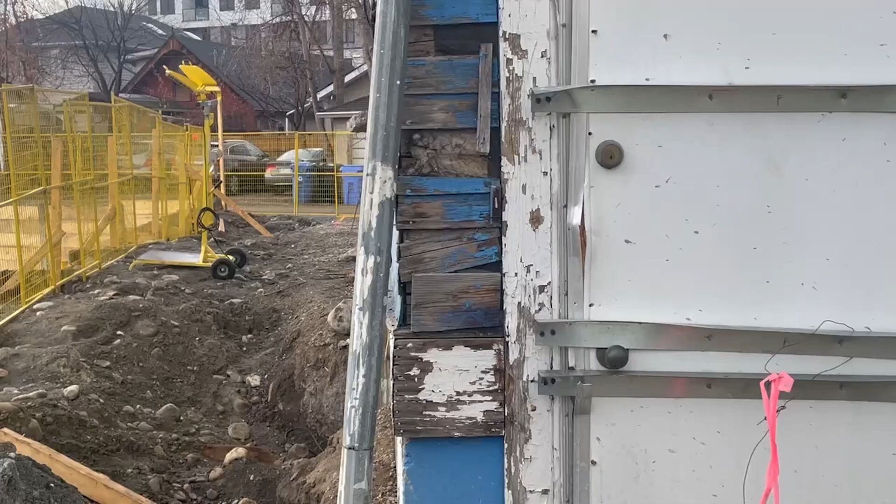Architecture, like music, is an immersive experience. It surrounds you, taking the form of an adaptive reuse project that aims to transform an existing church into an auditorium and performing arts center.

My focus has been on enhancing the experiential dimensions of architecture, engaging with changes in light, time, and materiality. This impulse emerged from my early explorations into the material properties of wood. As a natural material, wood has the potential to enrich sensory experience. By integrating the unique visual, tactile, and auditory qualities of wood into my design, I aim to recall the collective memory and experience of the site.

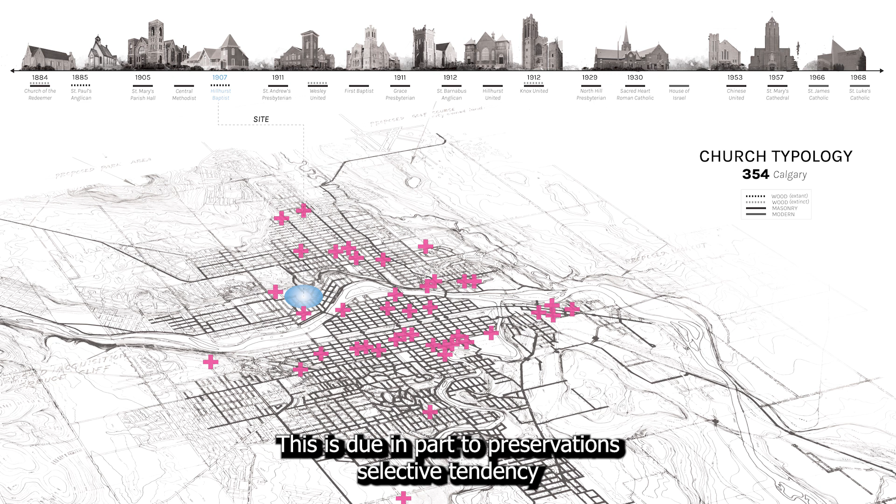My site is the Hillhurst Baptist Church, located in the neighborhood of Hillhurst and Sunnyside. It was built in 1907, a modest Carpenter Gothic structure, and one of the last remaining wood-frame churches in Calgary. This is due, in part, to preservation's selective tendency that places emphasis on the exceptional, which can be observed across Calgary, with the preservation of grand sandstone churches a common occurrence.

Historically, Hillhurst, like many other neighborhoods, was built around the church, which served the spiritual, cultural, and social needs of the community. However, having lost its primary use after the congregation disbanded in the early 70s, it's fallen into disrepair. By transforming the church into an auditorium, the social value of the building is restored.

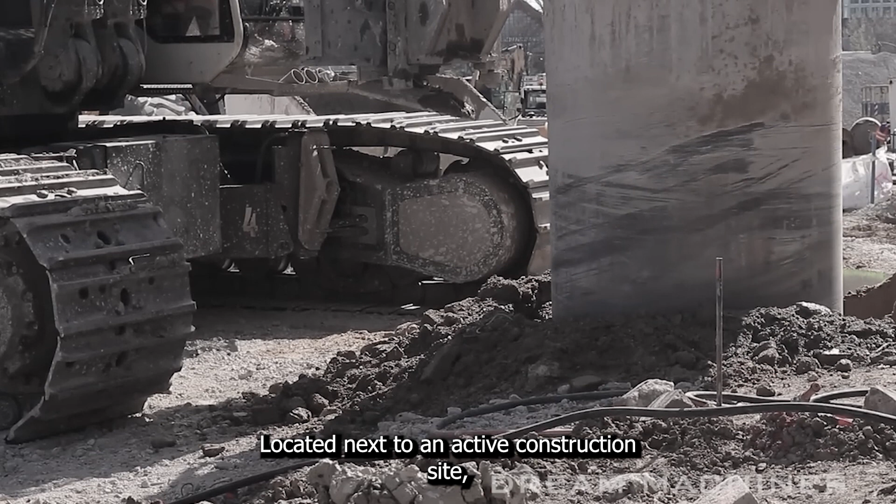Music and dance, like the church, are intricately connected to spirituality. This new musical program respects the historic use of the building while allowing it to once again live and serve an entire community. Located next to an active construction site, the church reveals the rising tension between preservation and development in the area.

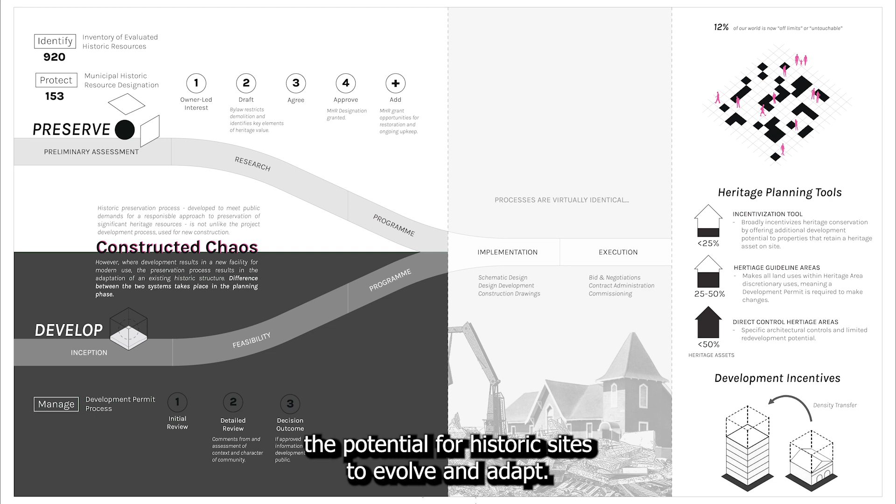The city's regime of preservation severely limits the potential for historic sites to evolve and adapt. Once designated, this building cannot be demolished, but is also subject to strict architectural controls.

The church also serves as a reminder of a forgotten material history in the area, which saw many structures built out of wood, often by local community members. With this in mind, I began to shift my focus to materiality.

Assessing the physical damage of the church, a predictable pattern of decay emerges. Paint peels and chips as the wood shingles begin to curl, split, and crack. The neglect of the structure prompted me to ask, why don't we preserve or restore wood structures?

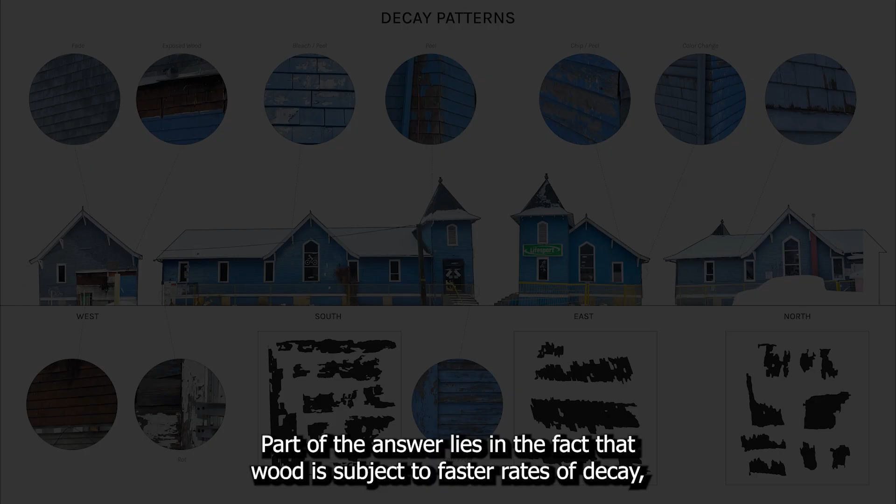Part of the answer lies in the fact that wood is subject to faster rates of decay and thus requires constant maintenance and repair. In response, I designed a repair process that would anticipate and embrace decay, specifically the weathering of cedar shingles. Rooted in the desire to allow the preserve to evolve, this repair strategy makes visible the passage of time. With a less labor-intensive process, the repair also enables continuous community participation in the upkeep of the structure.

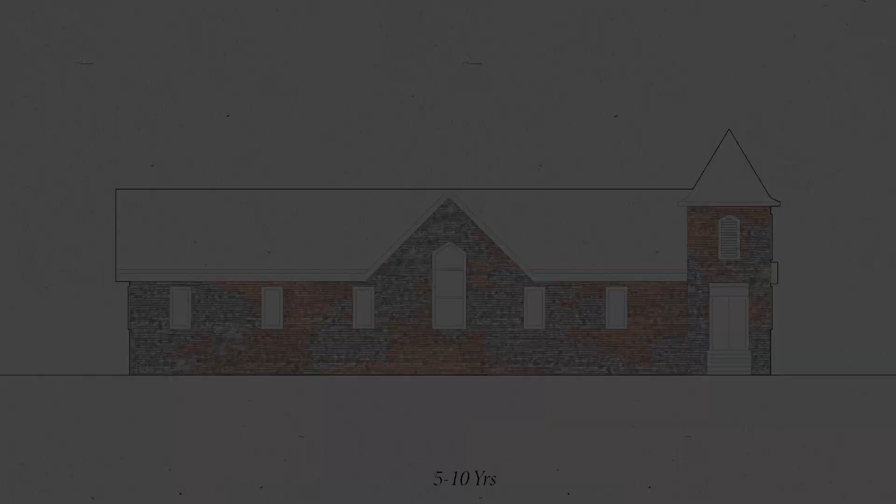Phased over several years, damaged shingles are first identified and then replaced. Over time, a mosaic of patinas appears, revealing rather than erasing past damages to the facade. The striking red color of the existing church becomes visible again only once the aging shingles begin to curl.

This process was inspired by the repair of my broken chair in Phase 1. Taking the form of a 19th century ladderback chair, once durable and well crafted, my chair was found in a state of disrepair. The project required the replacement of the missing seat and the repair of the loose broken joints which made the chair unstable.

The concept of repair asks us to reconsider the value of broken objects as providing an opening for engaging with, tending to, and caring for the things and people around us. My approach considered the concept of repair as care, where an object is approached with the same amount of consideration as would be given to the wrapping of a broken arm or the repair of the human body.

The action of continuously wrapping the broken joints reveals the passage of time and emphasizes the damage. Embracing the practice of visible repair, the cast or tensor bandage becomes a central feature of the chair, to the point that we cannot think and separate the injury from the repair. Through the repeated action of wrapping, knotting, and tying, we are able to track and trace the evolution of the chair through time, as it takes on a new and ever-changing form.

This allows for the preserved to stay alive and yet evolve. An important takeaway from the project was the recognition that an object repaired today will inevitably need to be repaired again in the future. Repair may be a slow process, one that happens repeatedly over many years, but it also provides us with an invaluable method that resists obsolescence and ensures longevity.

Complementary to the repair of the existing church, I designed a new extension that would hold the future auditorium. Taking its cue from visible traces left by the now demolished 1958 Christian Education Building, the church is extended into the neighboring lot. Next, the scale is increased at one end, allowing the form to project sound outwards to the community, similar to the functioning of a megaphone.

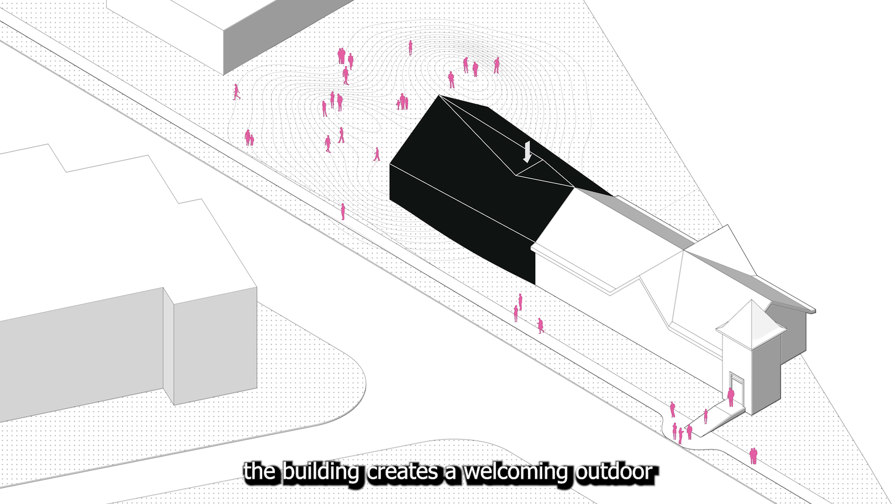Integrated with the landscape, the building creates a welcoming outdoor space for the community in an area of high urban densification, which has led to less public space overall.

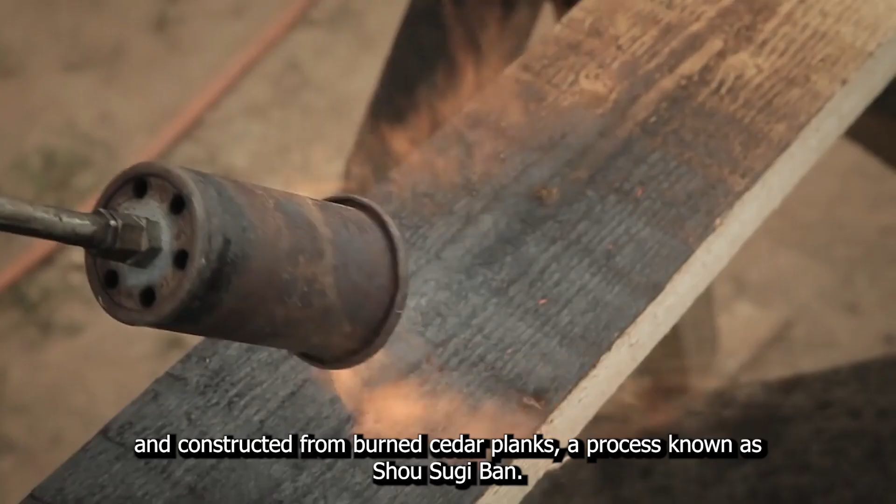In order for the new extension to retreat behind the listed setting of the church, it's conceived as a shadow of the previously existing structure and constructed from burned cedar planks, a process known as Shou Sugi Ban. The modern appearance of the burned wood is mediated by the image of a pitched roof and timber boards that reference the vernacular architecture of the area.

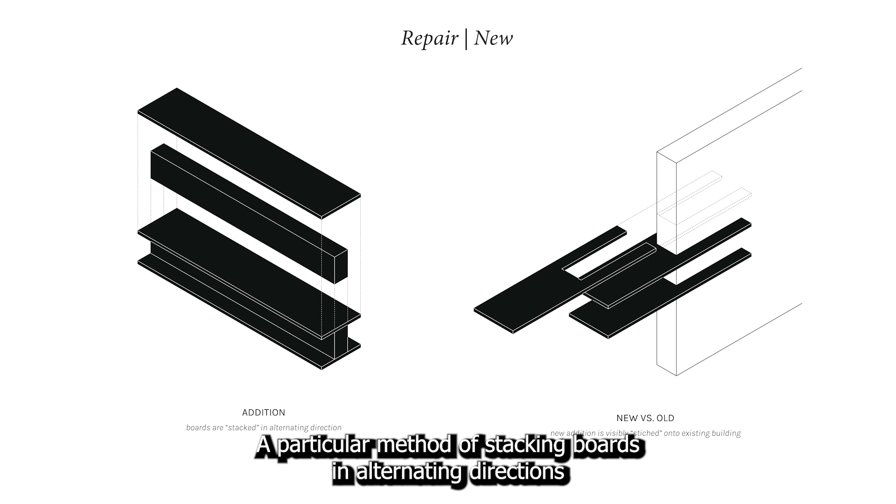A particular method of stacking boards in alternating directions allows the new addition to visibly stitch itself onto the existing church. This implies a certain level of impermanence that allows for the new addition to be removed if ever there was a return to the church.

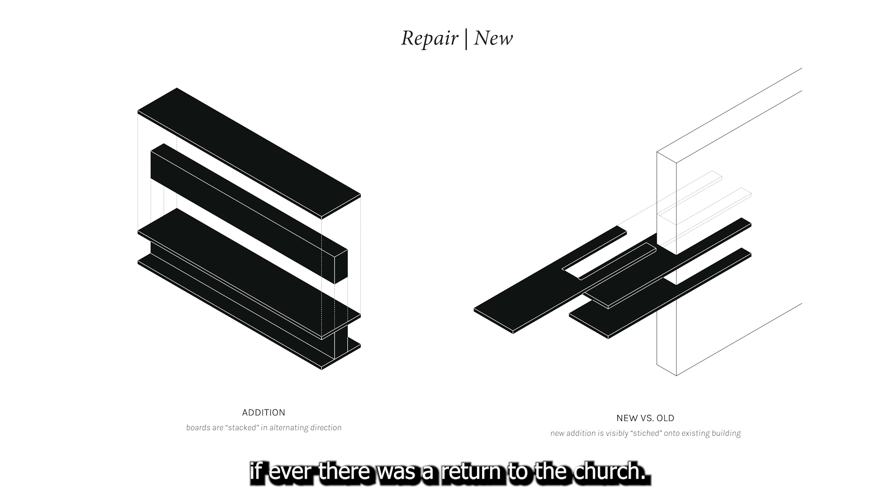On the west facade, a glass wall provides views and access into the auditorium, while also simultaneously extending the performance space outdoors. Integrated with the landscape, the building is designed to open up and deliver sound to the wider community.

An auditorium and performing arts center implies periodic use. Performances only happen at select times of day, not continuously. As such, the building is designed to respond in plan to programmatic changes throughout the day.

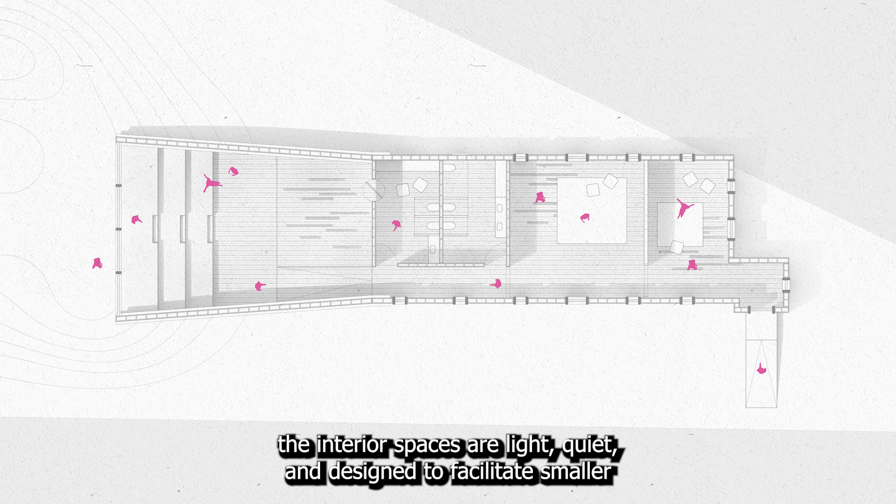In the morning, the interior spaces are light, quiet, and designed to facilitate smaller community-based programs such as meditation. Whereas in the evening, the spaces open up in response to the lively music and dance performances happening within.

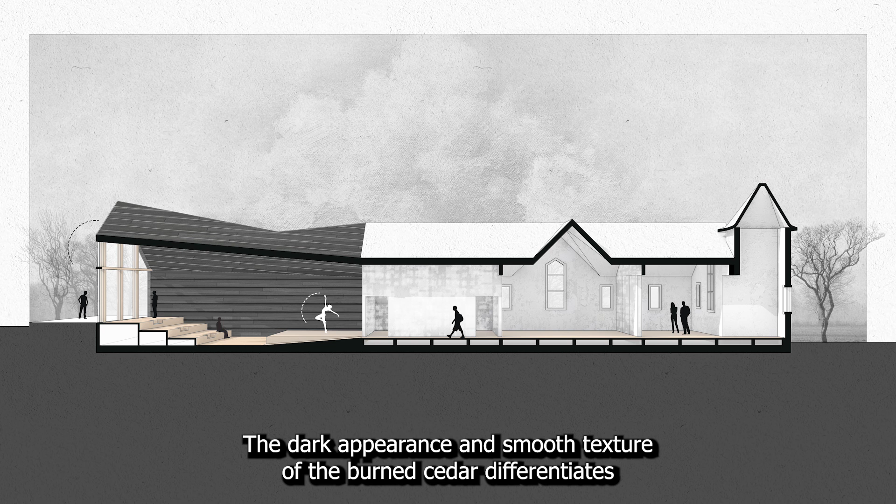Sensory experience within the building is enhanced through the application of materials, particularly wood, that have different visual, tactile, and auditory qualities. The dark appearance and smooth texture of the burned cedar differentiates the performance hall from the studios, which feature rough plaster walls.

Inspired by the way old wooden floors creak, I designed an acoustic floor that allows the building to participate in the creation of sound through movement and dance.

Looking at the xylophone as a precedent, I discovered that the vibration or sound produced by the wooden keys aligns with changes in the length of the key and the depth of the arch. These two parameters were tested through my concept model.

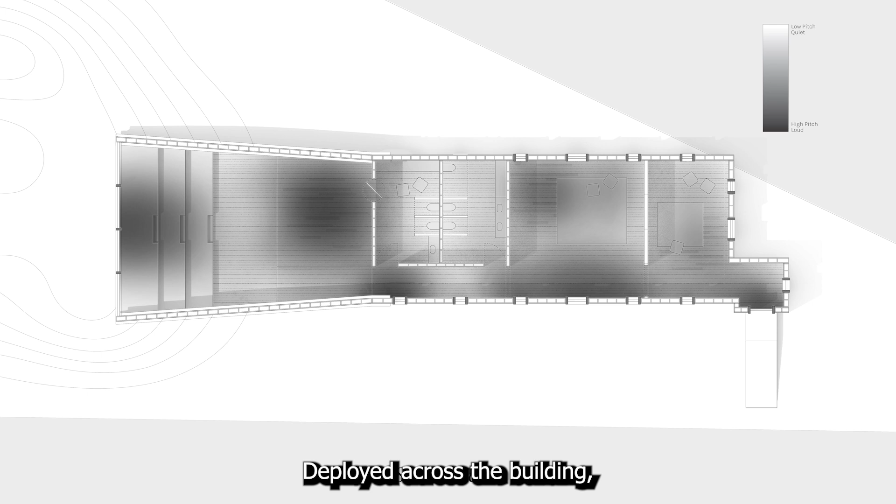Deployed across the building, these acoustic hardwood planks identify moving from one space to another through a change in pitch, and aid in the creation of a unique auditory experience.

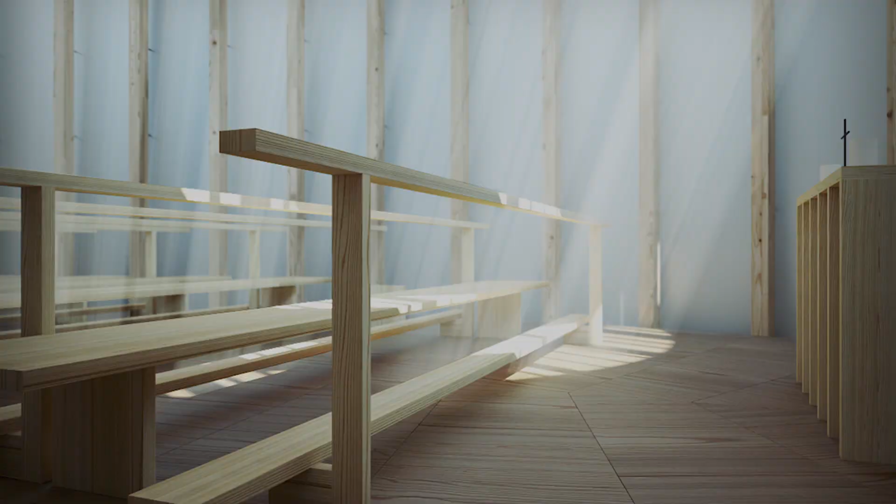To summarize, in the past, the church served as a community gathering space. Constructed out of wood by local volunteers, it represents a forgotten material history in the area. In the future, the space is reimagined as a lively performance hall. Not only does it provide a renewed sense of social value to the community, but it also recalls the collective memory and distinct experience of this place.

My finished project represents the middle, not the end, of the repair, recognizing that the process is never fully finished. The building is alive, constantly adapting to changing conditions and future needs. Repair in this context is framed not as a quick fix or solution, but rather a continuous process of creation, one that resists obsolescence and ensures a more sustainable future.